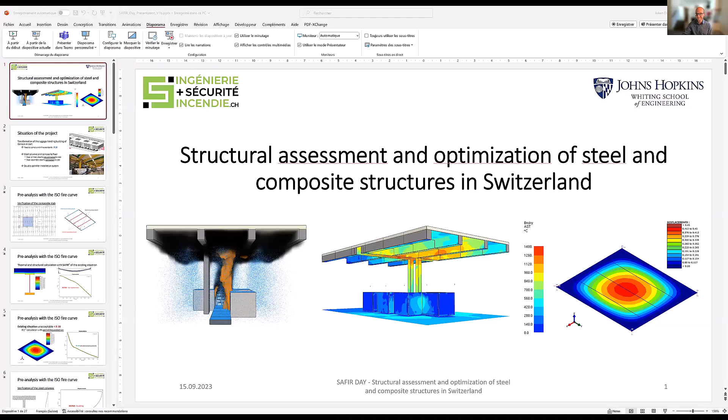Over to you, Eric. Okay, thank you everybody, just to thank you for the invitation today. It's a pleasure to be there with all the SAFIR community.

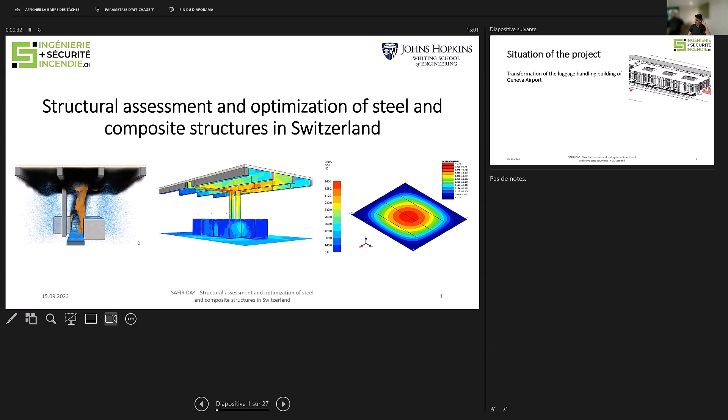We'll just do a very short introduction, then Julien will present the day. We have been working with SAFIR for more than 15 years now. We are doing a lot of projects quite every day. 3 people are working on SAFIR today, and in the office we are now 7 people.

Most of the problematic today is to define the thermal action, because we do not have problems with structural calculation, but it's always about finding the correct thermal action for our scenario. So Julien will focus today on this calculation and design, and we'll see that we've done a lot of advanced calculation for our clients. So let Julien speak, and I turn off my microphone.

Yeah, okay, thank you Eric. So the idea is to present some interesting projects in which we use SAFIR for structural calculation under fire and also CFD calculation. So let's start with this first project.

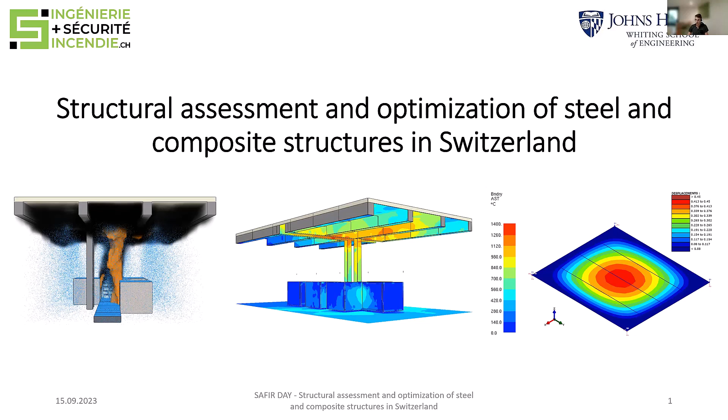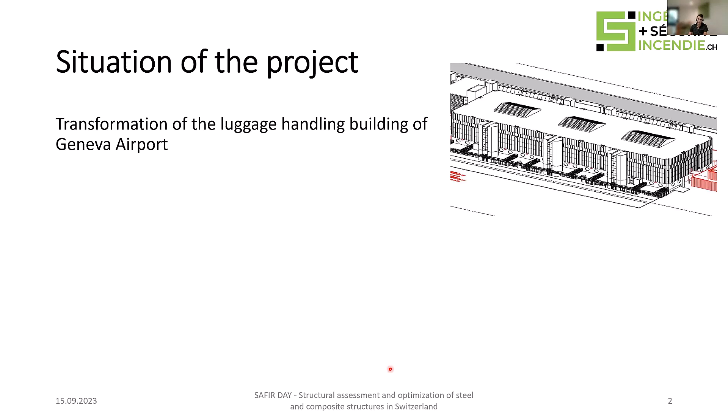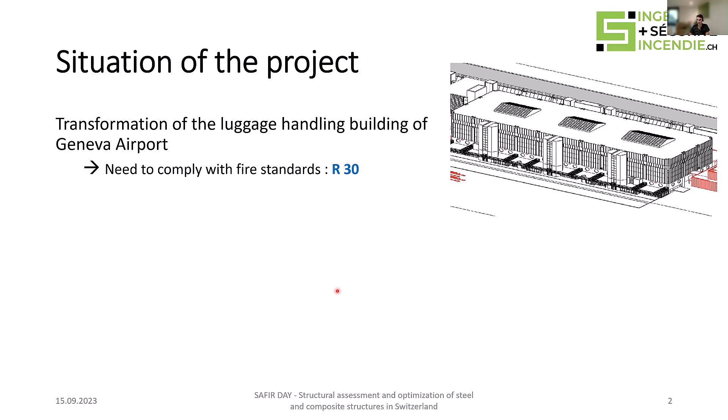We will detail this one a little bit more than the others. It's a project of transformation of the luggage handling building for the Geneva airport. For this project, of course, there is a need to comply with the Swiss fire standards, and regarding the structure, we have a requirement of R30, 30 minutes of fire resistance.

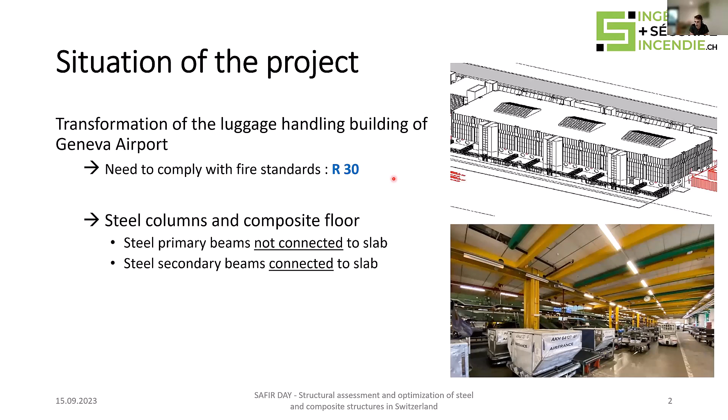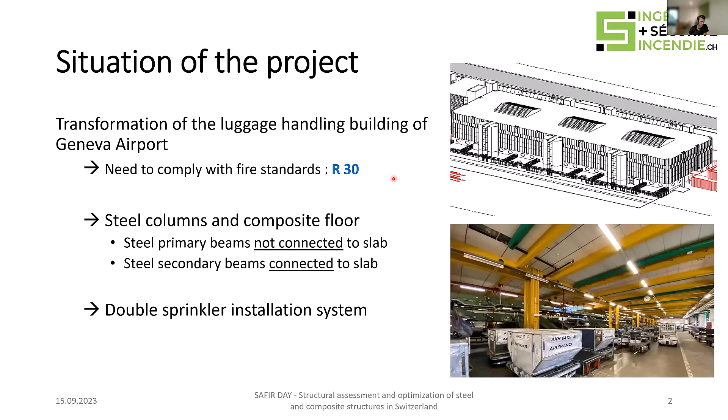So here we have a picture of the structure. This is a composite slab supported vertically by steel columns. Another interesting piece of information for this case is that we have a double sprinkler installation system. This information is interesting for the CFD model we will show in a few minutes.

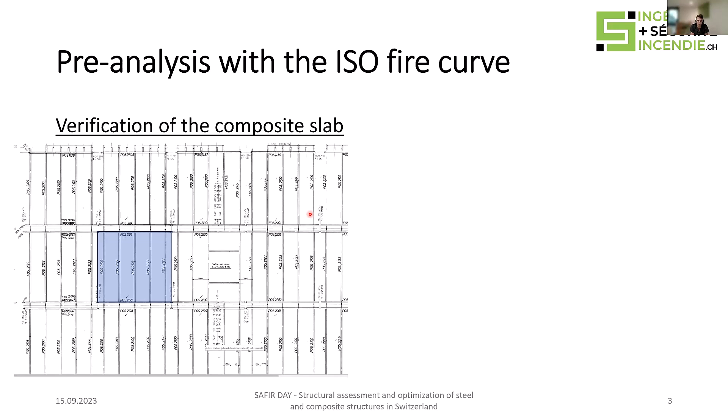But this is a huge area. So we have primary beams and four external beams and three internal secondary beams for this composite slab.

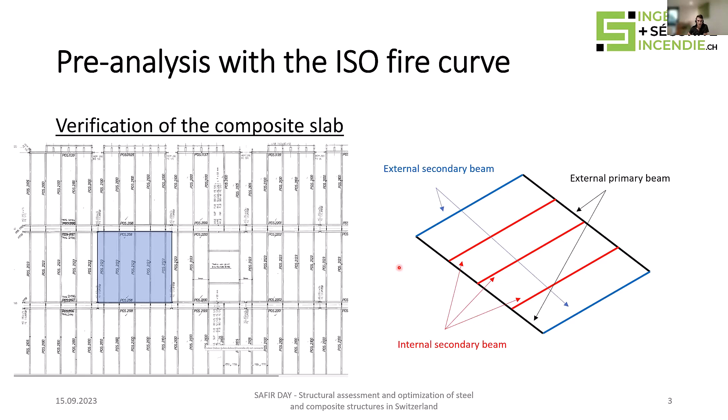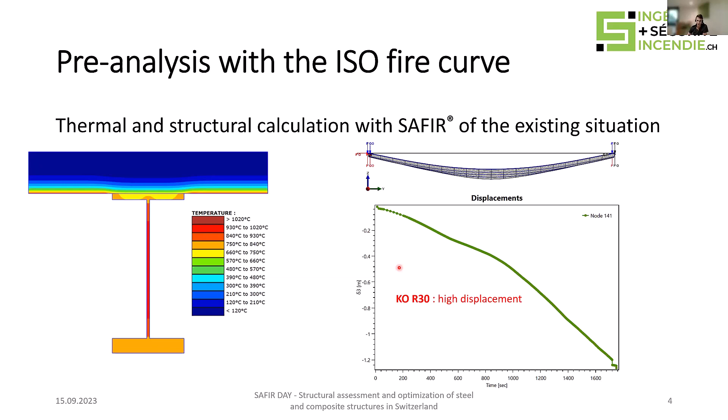And we see, yes, the huge displacement up to more than 1 meter vertically. So we cannot achieve the 30 minutes of fire resistance for the existing situation.

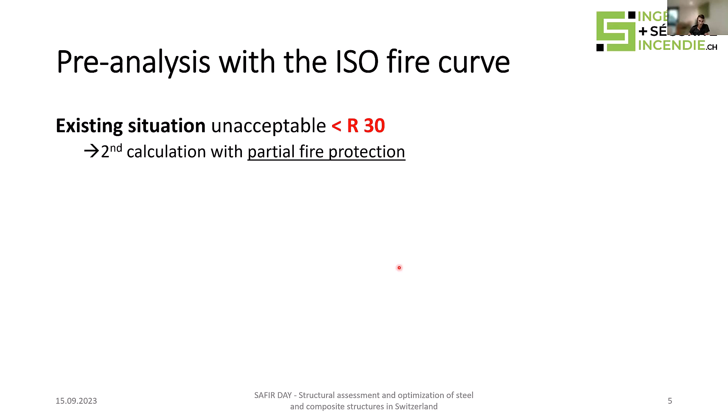So after that, we made a second calculation with a partial fire protection. The objective was to try to optimize a little bit the need of fire protection for the composite slab. So we will launch another structural calculation, still with SAFIR, considering all the external beams fire protected and just the 3 internal beams unprotected.

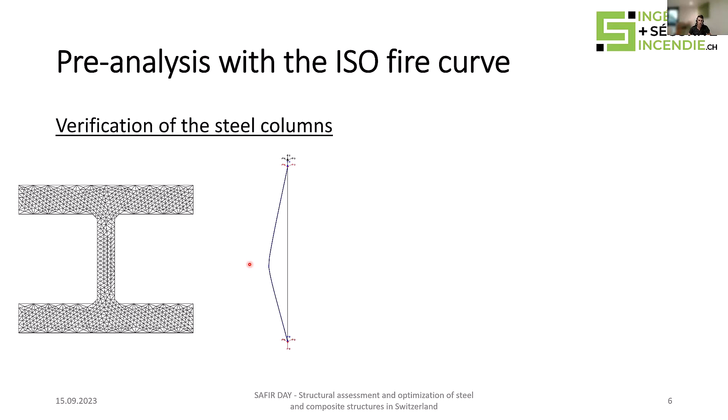check the behavior of the columns. So we have an example of one section here. There are several sections in this building, but the results were the same for all the sections because all the faces are exposed to the ISO curve. So we observed quickly the buckling of the column before the 30 minutes.

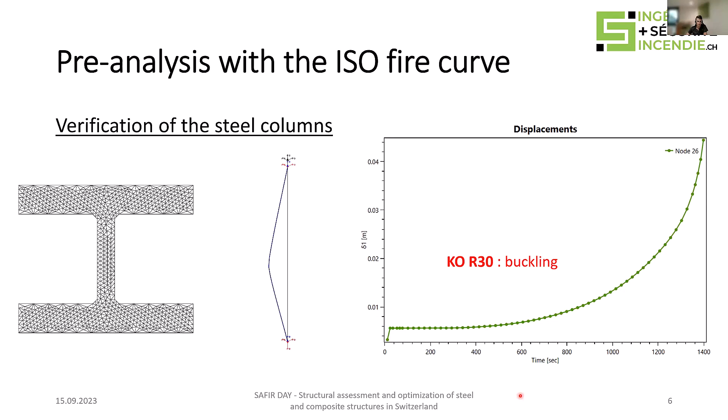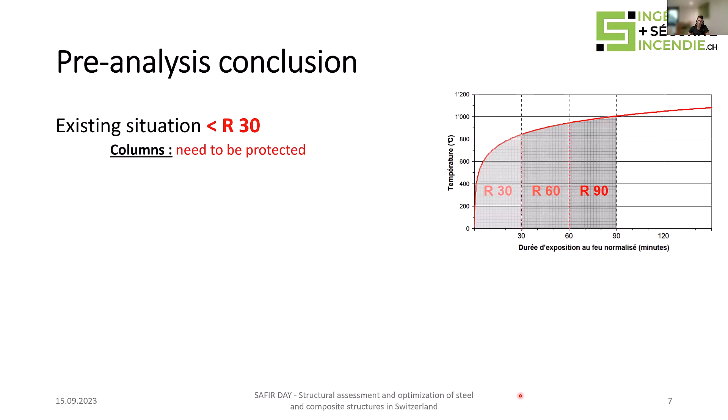So what about the results after this first step of analysis? Of course, the existing situation isn't acceptable. And if we stop the study at that step, we had to say, okay, we need to protect the columns and also the composite slab, not the entire composite slab, but all the external beams.

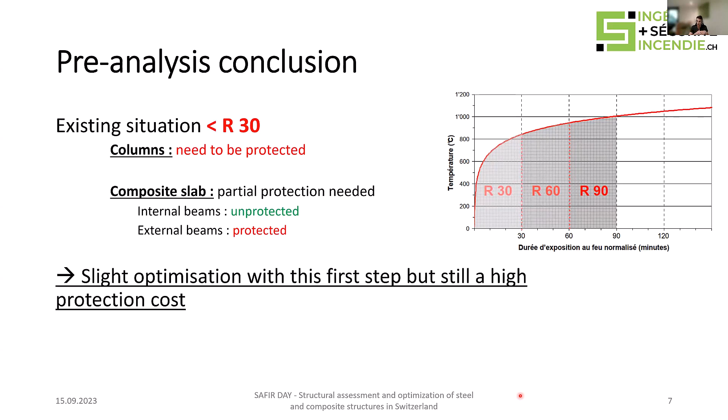We made a slight optimization with the first step of analysis, but there are still lots of beams to protect. And as it's an existing building, we had to protect all the beams on site. With the occupation of the area, it's a huge work, so a high protection cost for that protection. And finally, we have the question of whether the fire scenario was too conservative for the structure.

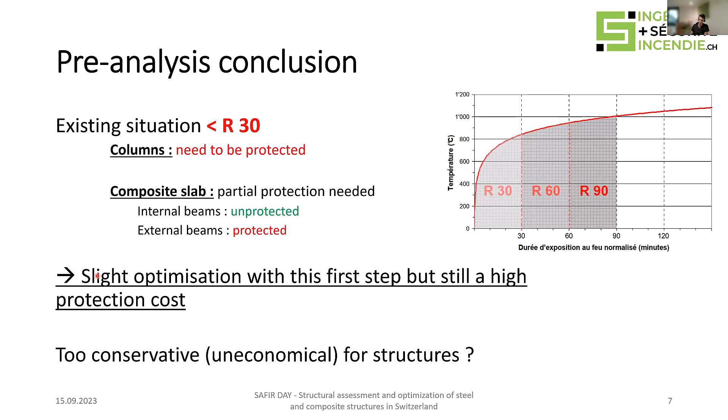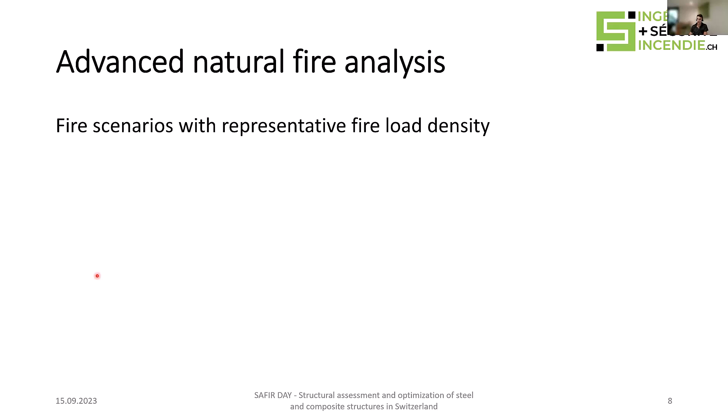So that's why we proposed to the client to continue the study with a more advanced study using a natural fire scenario. The idea with this second step of analysis was to take into account the real fire risk for the area. So here we have some pictures inside the building.

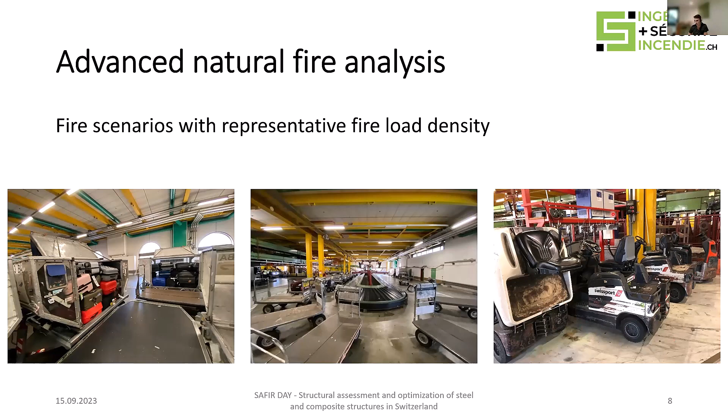So we can see the fire load density, which is mainly composed of luggage concentrated at the end of the different conveyor belts. We have containers, but also another kind, some trolleys. And also we have different types of vehicles just to move the containers full of luggage from the building to the planes. So we can also have a fire of such a vehicle.

As we said at the beginning of the presentation, we have a sprinkler installation system. So the idea with this natural fire analysis is to take this installation into account.

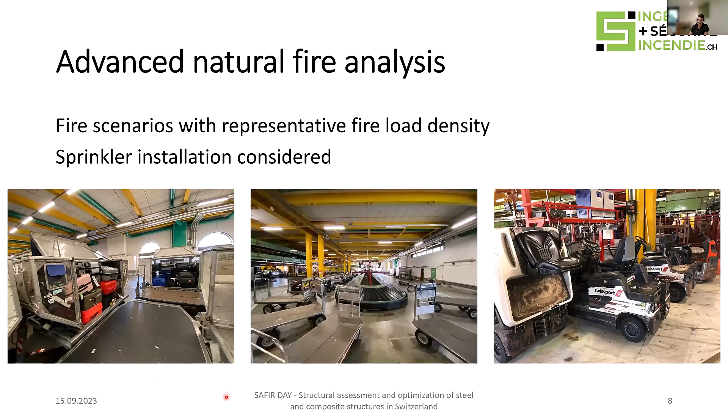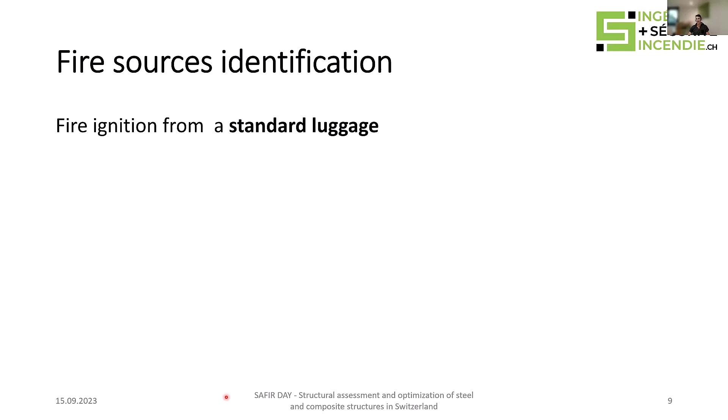After the identification of the potential fire source, we had to calculate the fire load density for the luggage. We have only standard luggage in the area.

What we did is use the composition for a cabin bag because it's mainly the same, but we had to adapt it a little bit because in a standard luggage we can have a bigger quantity of cosmetics, unlike the cabin bag. So we adapted this proportion a little: around 50% of the composition is plastic items, but we reduced the textile proportion a bit to have alcohol items, just to take into account the cosmetics in the standard luggage.

So with the heat of combustion of these different items, we could assess the fire load density of one standard luggage — around 800 megajoules.

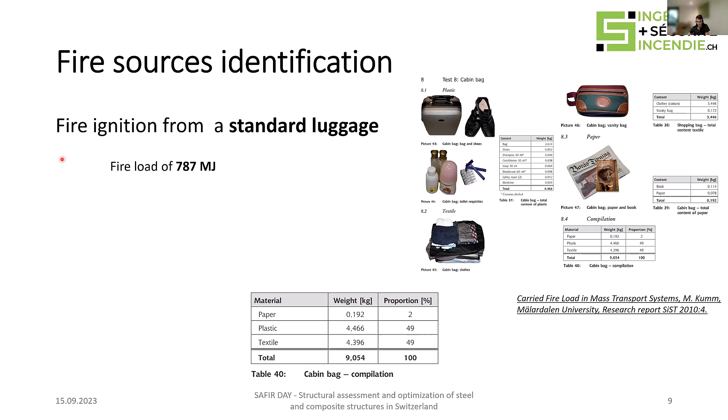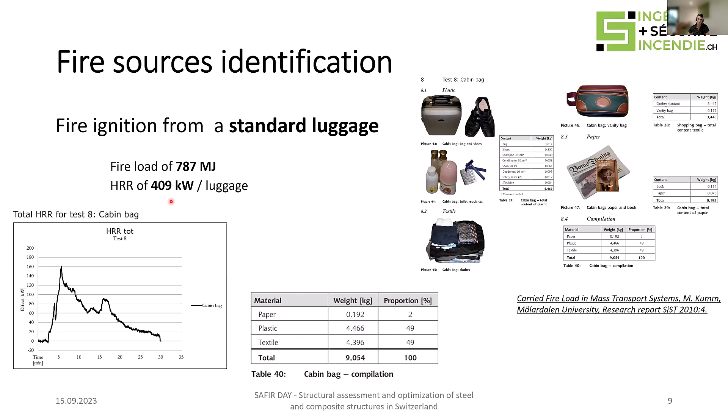There was one fire test for a cabin bag in the literature, so we used this heat release rate curve to make a correlation and adapt it for a standard luggage. We get more or less 400 kilowatts of heat release rate per luggage.

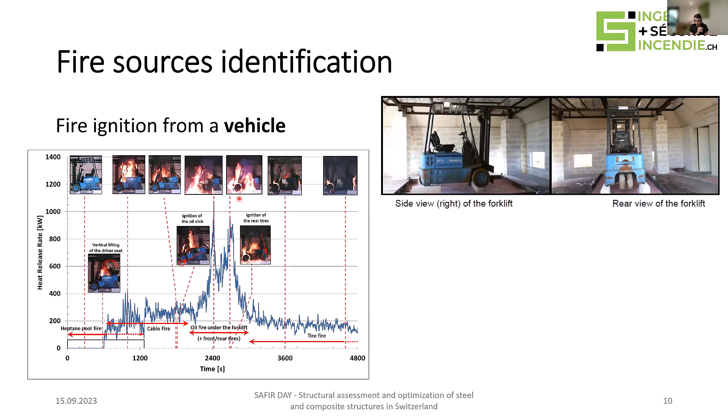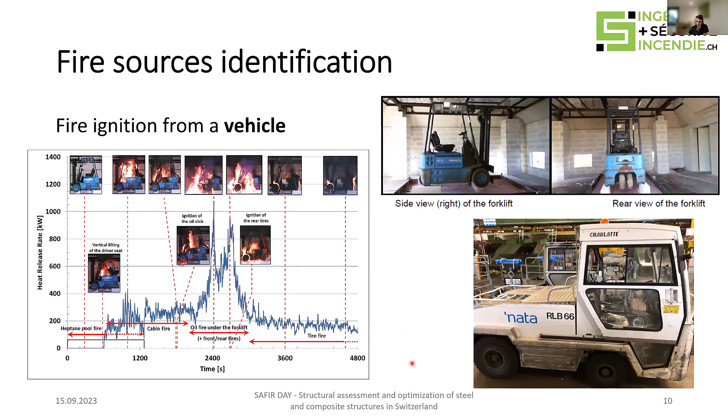Now about the vehicle — we also found different fire tests in literature for forklift vehicles, but the problem for our project is that we can have a bigger size vehicle, more like a simple car, but maybe with less fire load density. Still, it could be quite representative.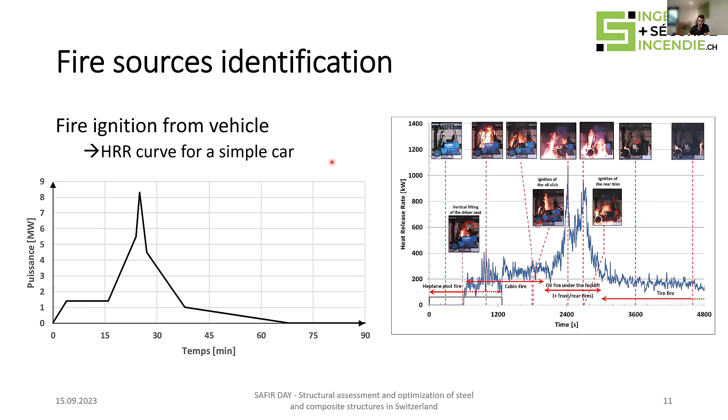That's why we made this assumption to use the well-known standard heat release rate curve for a car to take into account the fire of this kind of vehicle. It's probably a bit too conservative, but since we're on the safe side, it's quite okay for the Swiss authorities too.

We considered different scenarios for the study. The first was to consider that at the end of the conveyor belt we can get different containers full of luggage. The idea is to consider one luggage in fire at the beginning, and in order to have maximum thermal stresses on the structural elements, we located one column just in front of the first container.

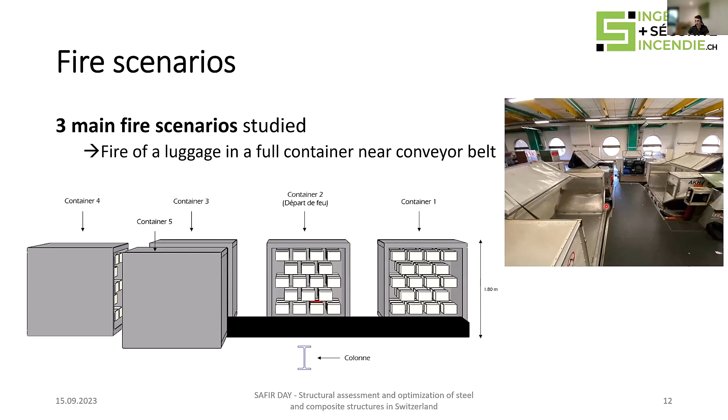So that's our first scenario — here's the real representation. We have to imagine that all these containers are full of luggage.

The second scenario is quite the same, but instead of containers it's for trolleys. The main difference is that they are open over the entire area. We thought it was interesting to study this scenario because the thermal stresses received by the structural elements could be different if the fire is contained in a closed box versus on trolleys that are open over the entire area.

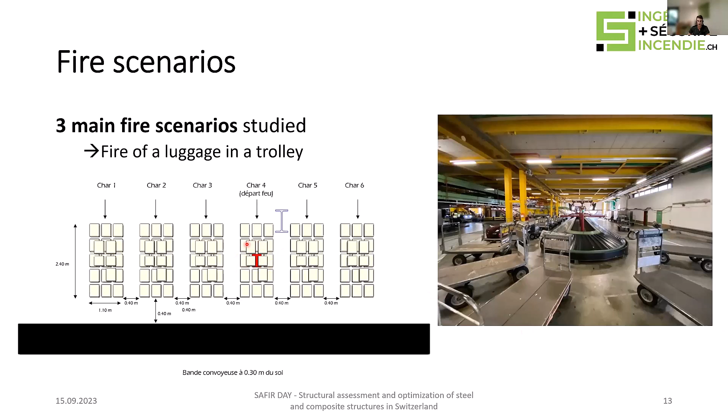So it's still a luggage fire as the ignition source near a steel column. Finally, the third scenario is quite the same, but instead of a luggage fire source, we have a vehicle as the fire source.

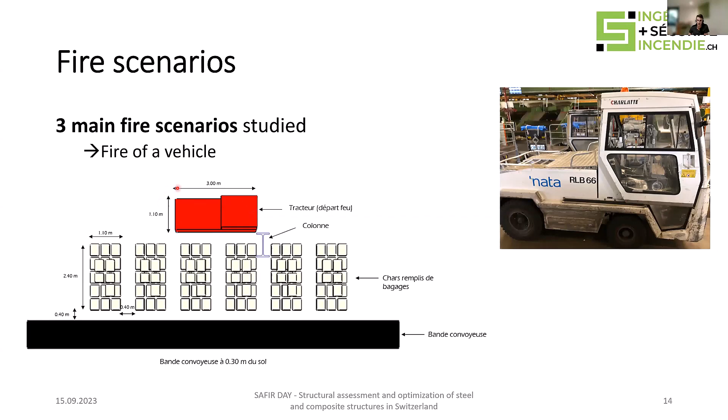Here is the CFD visualization of the simulations we made with FDS. We can see this behavior a few minutes after the start of the simulation — the high flame lengths. This happens because just a few minutes in, the fire spreads inside the box, since we have around 40 luggage items inside the containers. The fire can spread very easily, and we get a very high heat release rate in the container, which is why we see this kind of fire.

A few minutes later we observe the activation of the sprinkler installation, which we modeled directly in FDS. The idea was to check the influence of the sprinkler on the thermal stresses received by the structural element, but also its influence on fire spread. We can see here that the fire spread occurs — we'll just discuss this.

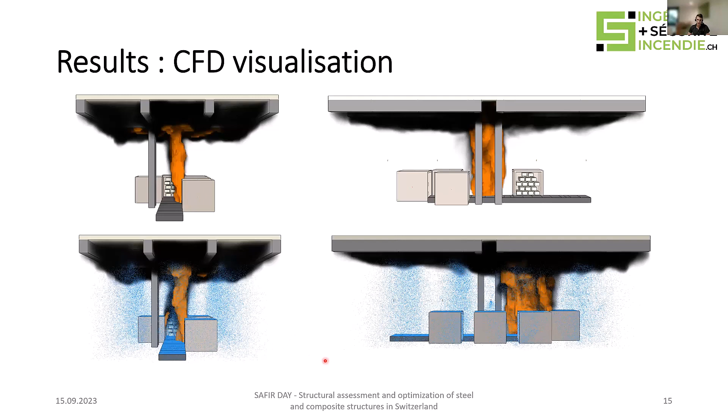How can we explain the fire spread even with a sprinkler installation? One first assumption we chose concerns the ignition temperature: at the beginning of the simulation we considered only the fire of one luggage, and to account for the possibility of the fire spreading, we imposed an ignition temperature on each luggage.

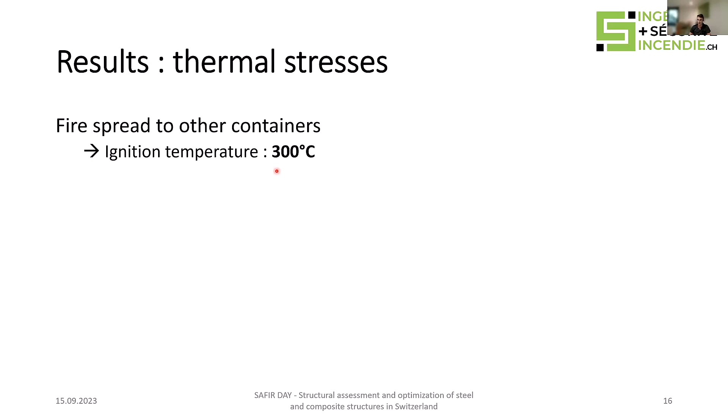We chose this value of 300 degrees because in the luggage we saw that we have different items: plastic items, textile, alcohol, or papers or cellulosic materials. We chose the lower values between these different items, because 300 degrees is quite representative of the ignition temperature for cellulosic materials. So it's probably a bit conservative, but one more time we are on the safety side with this assumption.

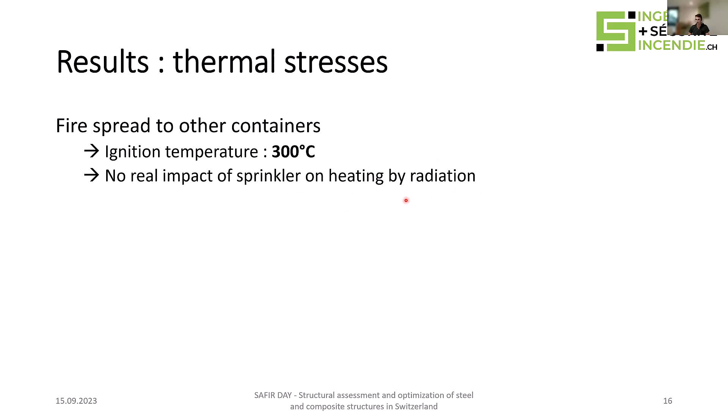Another explanation for this fire spread scenario: we consider the fire inside a steel box, inside a steel container. So finally, the influence of the sprinkler on the fire is quite limited, because there is no real interaction between the luggage fire and the droplets due to this box. So we still have an intense radiation even if the sprinkler activated.

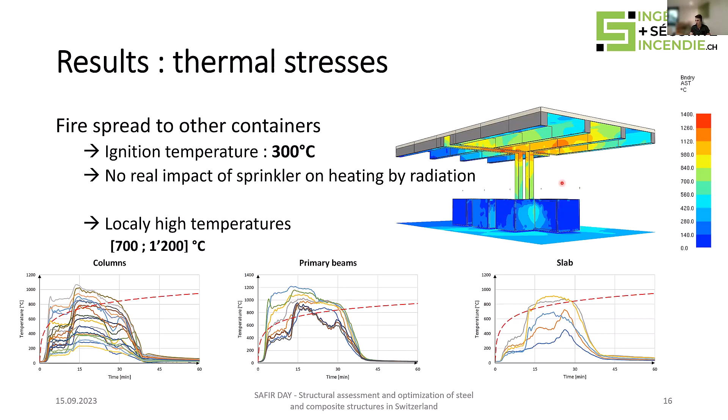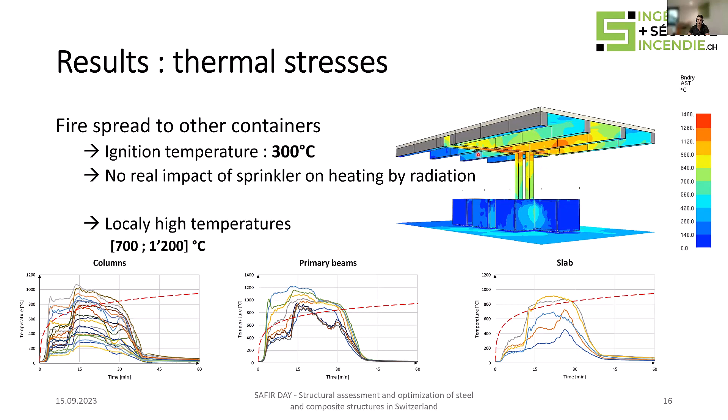In order to have more accurate data, because the objective with this approach is to couple the CFD results to SAFIR to study the structural behavior of the slab and also the columns, we use different adiabatic surface temperature devices located at different positions on the columns, also on the slabs and the ceiling beams.

So we use the same structural model as for the ISO fire, but we adapted the thermal calculations. We impose as boundary condition the different AST curves we calculated with FDS, in order to study the behavior on the natural fire scenario.

This first calculation is representative of the existing situation, so without any fire protection. We see that the resistance of the composite slab cannot be achieved with this scenario.

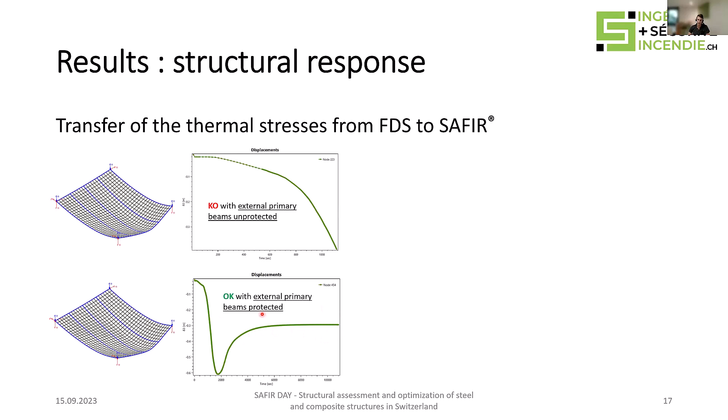So we launch another simulation, still for the slab, but considering the protection of the external primary beam only, so all the secondary beams, internal and external, are unprotected. With this optimization of the fire protection, we can ensure the fire resistance for this scenario.

And for the column, it was the same result as for the ISO fire. We saw the high temperatures locally, so the columns are a bit sensitive to this kind of thermal stress.

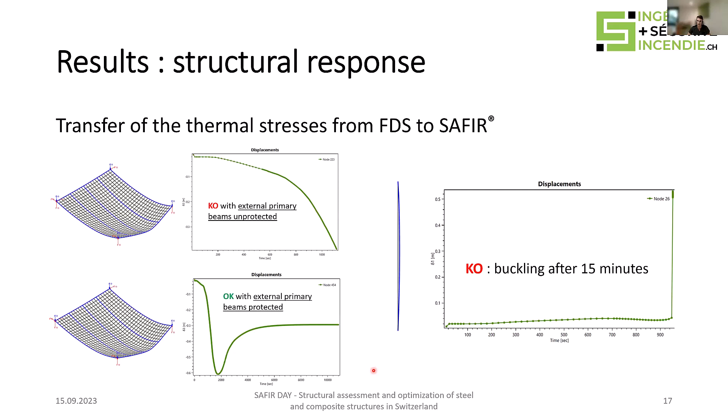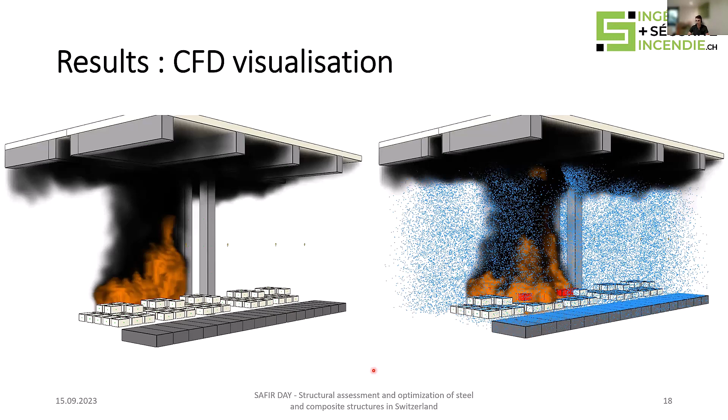Very quickly, here are the same kind of results for the other scenario. The difference is that for the trolleys, we have less luggage on each trolley. So when one trolley is on fire, there is a lower heat release rate.

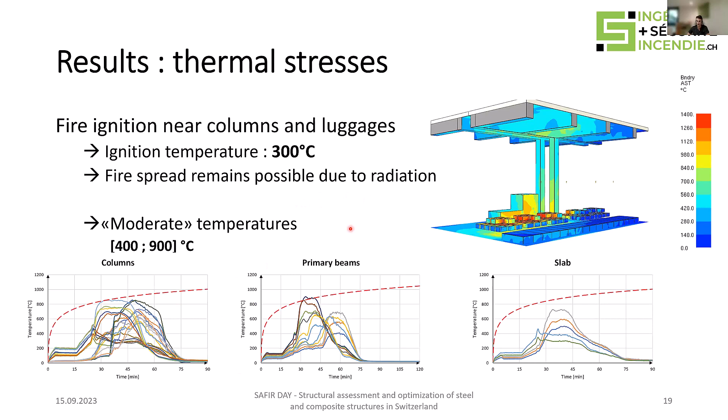We can see this with quite moderate temperatures compared with the previous scenario, and still with the adiabatic surface temperature curves, we use it to make a structural calculation with SAFIR.

The difference is that as we have moderate temperatures, we can ensure the resistance of the slab without any protection. But for the columns, we have still the same results.

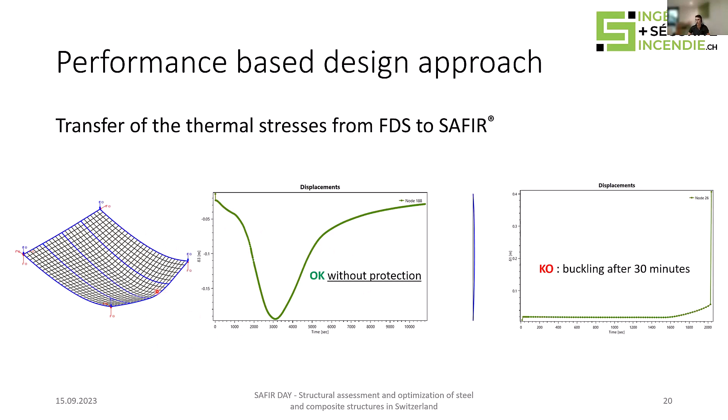So the conclusions: we made an advanced study in several steps. Before we made any study, the client thought he had to protect the entire slab.

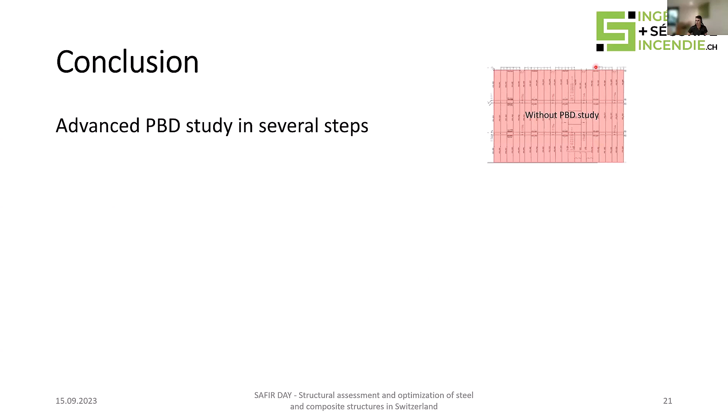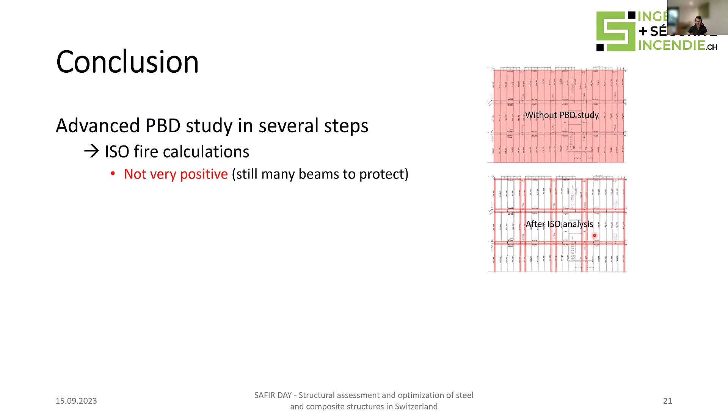After the first step, we saw that we could optimize a little bit by protecting only all the external beams. And after the final step of analysis, we could optimize a little bit more, protecting only the primary beams for the ceiling, and of course all the steel columns.

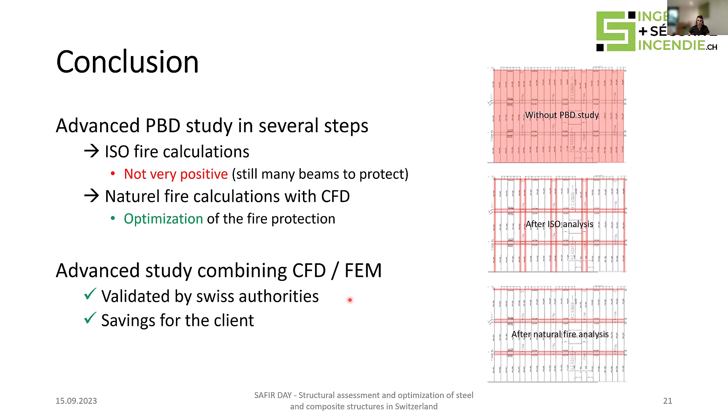So that's all for this project.

Just a few words about another interesting project in which we used SAFIR calculation. Maybe some of you heard about this project because we already presented it in previous conferences. This is for an existing tunnel.

There is a tramway project for this existing tunnel. The particularity is that this is a tunnel under Geneva Airport, so under the runway. We have the runway here in blue and the tunnel here in yellow.

Here's the structure of the existing tunnel. This is a pre-stressed concrete structure in that direction. We have also rebars in both directions. The idea was to model the structure of the tunnel and check the behavior under fire, because we cannot have any displacement for this tunnel. We can imagine why - we cannot stop the Geneva activities.

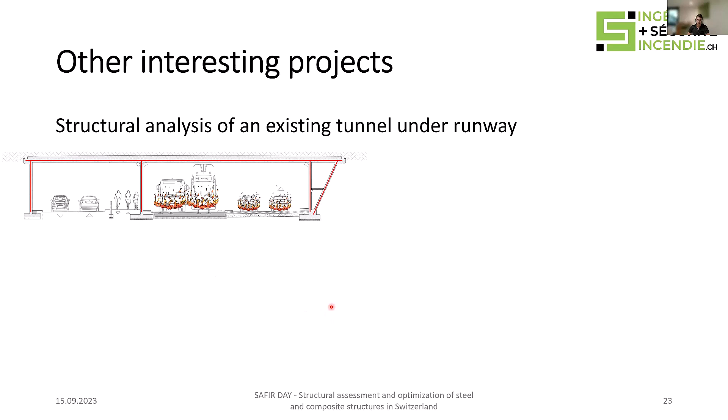So like the previous study, we made two main steps in this analysis. First step with standard fire curves, with the ISO curve, RWS curve, which is more adapted for tunnels, and also with natural fire curves, so with a fuel tanker, heavy goods vehicle here, and for the tramway. We used FDS for the natural fire curves.

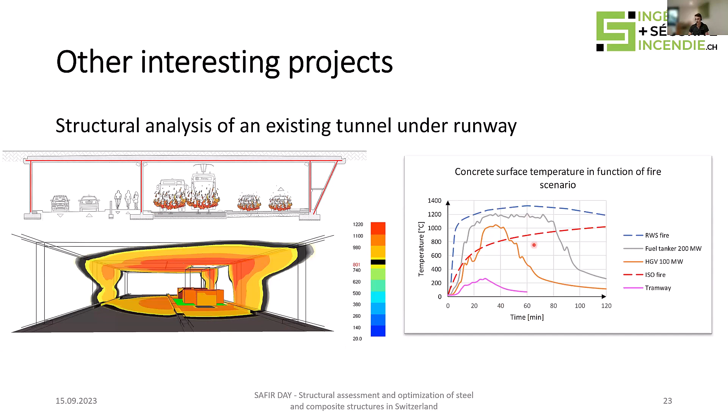And when we checked the behavior of the existing structure, we saw that except for the tramway, the existing situation was not acceptable, due to high deformation and maybe up to the collapse of the structure.

So there was a need to improve the situation. We proposed to the client a combination of solutions: passive measures, and also active measures with water mist. At that step, we used SAFIR calculation to design the passive protection in order to optimize the position of the passive protection in the structure, and to know which thickness we have to plan.

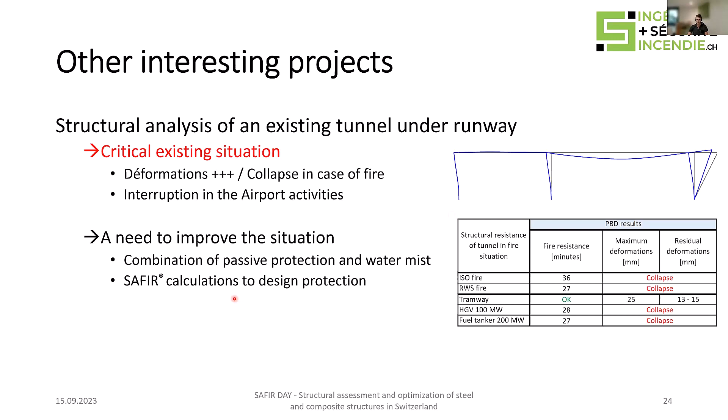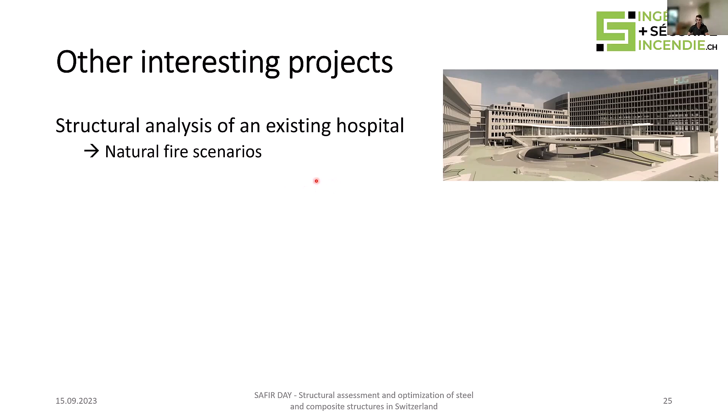To get lower displacement in case of fire. Last word about this final project, this is for a hospital in Geneva. The project was to transform the different levels of the hospital. We used natural fire scenario, not CFD model at that time, just zone model, because we can see from the fire plan of the project we have simple geometry, simple fire compartment, so we could use zone model for that.

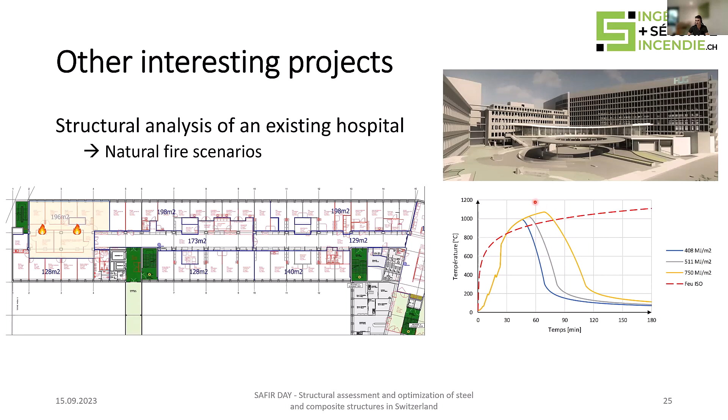We analyzed the situation for different fire load density. The blue curve is for the real fire load density, and we wanted to challenge a little bit more the structural behavior of the slab, so that's why we checked for different fire load density. To do that we used SAFIR once more with a more advanced concrete slab model. We represented just one part of the slab in order to heat it representatively with the fire compartment, and another part remained cold, and we checked the behavior. Finally, the conclusion of that study is that we could prove the fire resistance of the concrete slab thanks to the natural fire scenario, and without any protection.

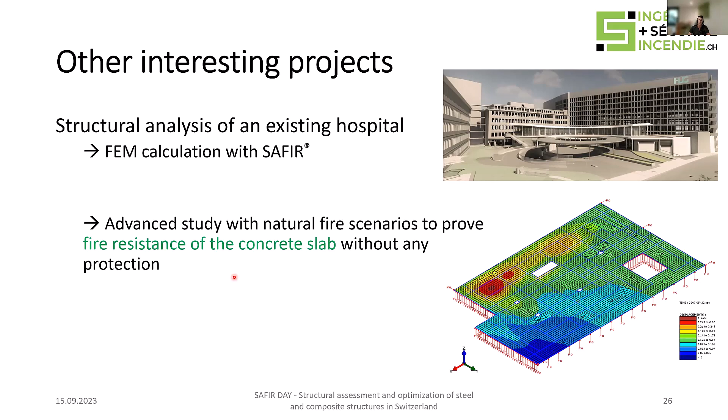We have a couple of questions on the first example that you discussed. Could you please comment on the structural design of the floor, or are interested in the cross-section and reinforcement details? So for this slab, the primary beams were not connected to the slab, we only have connectors to the secondary beams. That's why we concluded that the primary beams were more vulnerable than the secondary beam, so after protecting these beams we got better behavior in the fire.

I see, thank you. But what is the slab, the floor design in that? It's a composite slab, so we have a steel deck with a Holorib deck, and concrete slab with rebars, and reinforcement in the concrete. Do you know the amount, or do you have a sense of the amount in square millimeter per meter? No, sorry, I don't have the information in mind.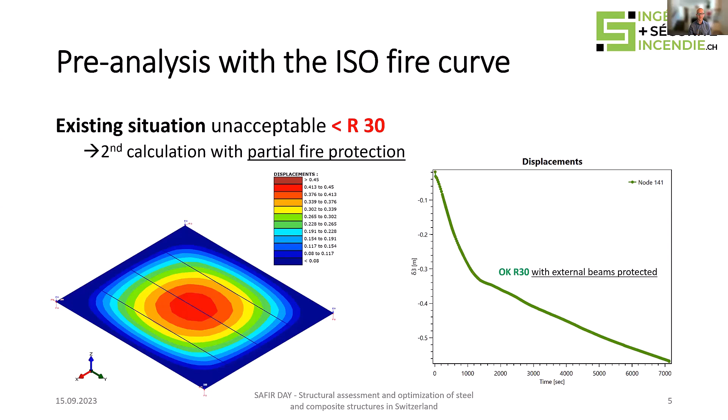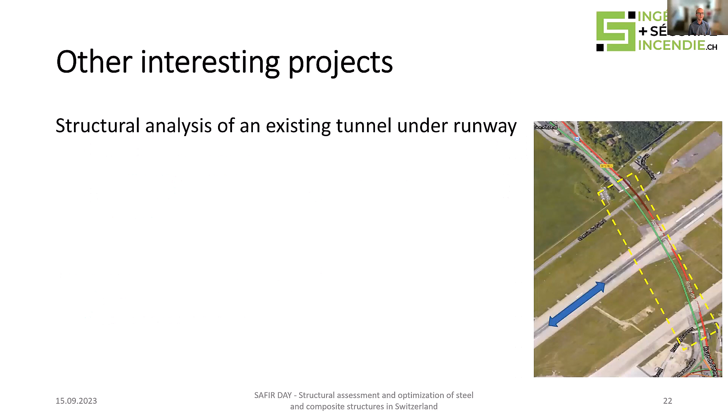Thank you, Julien. We have another question from Nacho from Valencia about the tunnel, because you didn't have too much time to discuss the tunnel, but can you comment on how you handled the soil? Did you use springs to represent the effect of the soil? Did you apply any horizontal loading? What were the boundary conditions for the tunnel? Yes.

For this structure we used a simple model. We used replacement load, replacement force, in order to take into account the pre-stress cable, so we adapted the force at each time step of the simulation to take into account the thermal elongation of the cable. We also applied horizontal force at each side of the tunnel to take into account the soil.